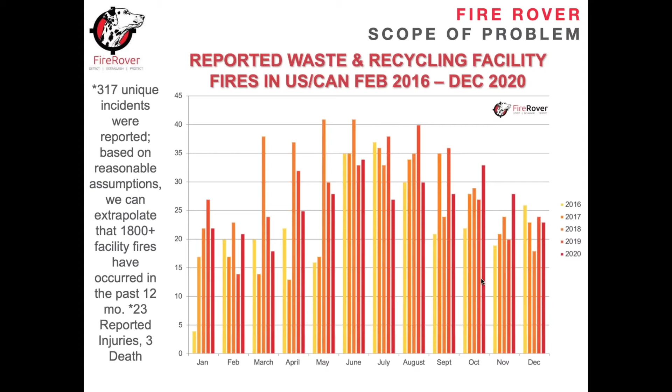So let's talk about the scope of the problem. So basically, if you look at fires, over the past 5 years, I've been reporting fires. This is all the data by month. But really, if you look at an overall basis, in the US and Canada, we've had 317 on average fire incidences that were reported by a media outlet.

And so the reason that I use that as my data was when I first started looking at the industry, there was a lot of, I don't want to call it a cover up, but there was a lot of things that were happening on tip floors and on scrap metal sites where there was inherent risk of fire in the industry and in the business, but it was maintainable. You would have some fires, and about 50% were those traditional hazards. Lithium-ion batteries brought an entirely new hazard to focus.

And again, when you look at lithium-ion batteries, they're a relatively safe type of technology. They're amazing, right? They've made our world amazing. But the problem is that you're not having a ton of issues in the front end of the supply chain, but the back end of the supply chain, where waste and recyclers, if you really truly think about recycling, the goal of recycling is to ensure that you put the least amount of material inside your landfills.

So if you look at waste and recycling, the amount of curbside recycling plus construction and demolition recycling, which is all the buildings, and if you have a hurricane, all that material that gets recycled instead of going to a landfill, and then scrap metal, where they're taking and reusing metals, is an amazing amount of tonnage that doesn't go in. So really, at the end of the day, we have this unbelievable technology whose costs and hazards are being burdened by an industry that I don't want to say needs help, but definitely needed a new approach to look at it.

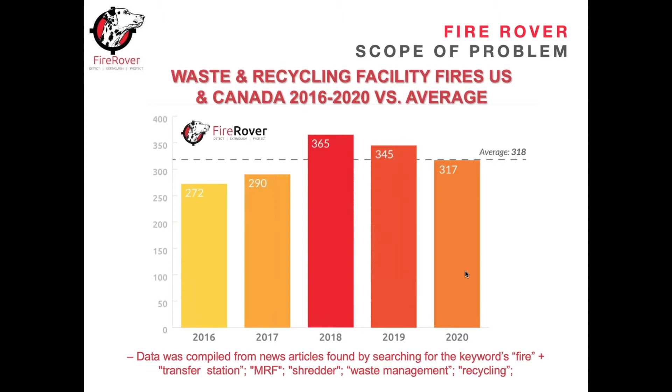But at the same time, it could use some producer responsibility where the manufacturers help solve the problem, as opposed to sitting a little bit earlier in the supply chain, and not necessarily admitting or actually taking responsibility for the problem. The reported fires that I consolidate are all reported from basically Google alerts, right? And in the beginning, there was no data out there. So fire plus transfer station on a Google alert. And if I saw a fire, I would report it at the end of the month. Same with MRF, shredder, waste management, recycling.

So this year was an exciting year. We do have the Fire Rover client saves, and saves are different than an incident, but these are when we've actually put a fire out that was happening, right? So, in 2020, we put out 207. We're in 182 locations. We're in 8 of the top 10 waste and recycling organizations in the US and Canada, so we've been blessed that we've been able to prove that our solution works. But really the goal is to try to take the publicly reported fires and watch them go down.

And what I'm hoping is that in '18, the U.S. and Canada, as well as countries and operators across the globe, had seen the increase in lithium-ion batteries. I mean, basically, they didn't know they were coming. Well, now they know that they're coming and they've prepared, and there's some that have taken technology to another level. There are some that are still a non-believer in what the technology can do.

But really, at the end of the day, the goal is that as we get more client saves, there's going to be less reported fires, and then obviously less known fire incidences, and then reasonable amount of fires. And the reason I use reasonable amount is that I look at a reasonable population assumption of the UK that actually does a great job reporting these fires because they have the environmental agency that requires that these fires are reported.

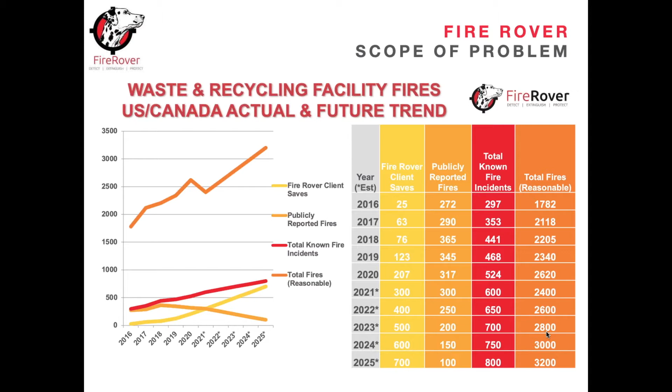So if you look, this is the data from 16, 17, 18, 19, and 20. And again, you can see that waste paper and plastic makes up about 50% of the fires over the last 5 years. The reason I include all those, if you look, the UK will do the same thing where they'll include hazardous, or they'll include household recyclables as well as transfer stations, which is pretty well what this number is. Scrap metal is definitely its own animal.

And again, we had a huge spike in 2018. The numbers went down, and into 20, they have been going up steadily for the past 5 years, at 103 per year. And again, scrap metal, I'll get into specifically, but the industry has focused on traditional tactics they'd used before to try to solve their problem, and they become better operators. But the question becomes, can the things that they've put in actually start to decrease the fires, or are we only seeing what waste and paper and plastic has put in that's going to show the effectiveness?

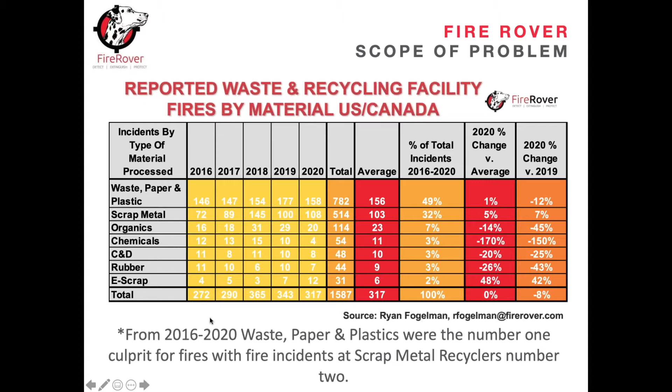We also have C&D, which is construction and demolition. It's probably underreported. Some of that is in waste paper and plastic, just based on misunderstanding of what the reporters report on. The big thing right now is electronic scrap. The idea that a lot of entrepreneurs are trying to pull the rare earth metals and the lithium-ion batteries out of electronics. And again, there are some really good innovators and some great operators out there, but there's also a lot of guys who are just trying to build a business, and they really don't understand the full hazards and risks. So e-scrap, we've seen those numbers grow. I saw 4 in December alone, so it's definitely something that we got to keep an eye on.

EREF, which is the Environmental Research and Education Foundation, has put together a study on the assessment of fires at recycling facilities and scrap metal facilities. What's nice about this is that this is the U.S. and Canada version of the fire survey that we definitely need, and I'll show you some in the EU and the UK that have been done as well, and some of those results. But we just got some preliminary data back. EREF does a great job. They're working to try to get as many waste recycling and scrap metal operators to respond. And I think you see 286 and 281.

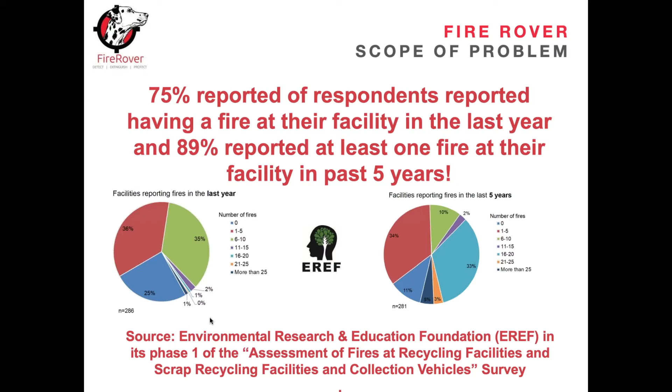But the interesting thing, and it's a high level fact, is that basically over the last year, 75% of respondents reported having a fire. And then in the past 5 years, 90% have reported to have at least one fire. And typically when they're answering a survey, it's going to be big fires. It's the fires they remember, because a lot of these are just going back to recollection.

Eunomia, which is a company in the UK, and the environmental agency had actually put out a ton of data, and they also did a survey. So I'll be talking about that a lot during the scope of the problem. But in England, 49% of their fire incidences came from the transfer stations and recycling, which is pretty equal to what we have. Now, the interesting thing is the scrap metal fires only account in the UK for 18% of fires, whereas in the US, we're seeing that at 32%.

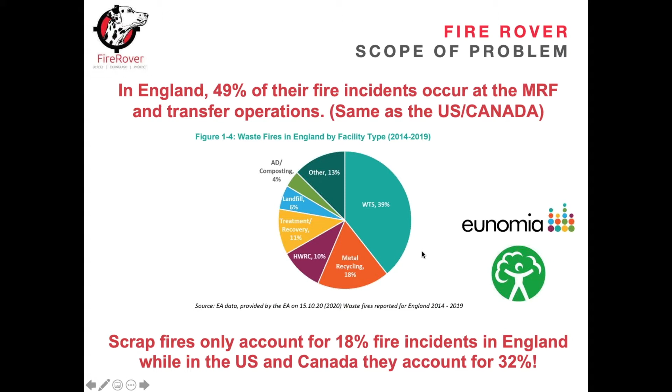And again, the cause of that, we're not 100% sure, but that's really some of the things that we're trying to figure out the solution for. Now, what's causing the fires? Again, traditional hazards. There's always been hazards of pool chemicals and all the different pieces inside, hot ashes, paint. There's always a spike in the summer, and that's from fireworks and hot ashes. And we also believe heat and dry environments, as you look to number three.

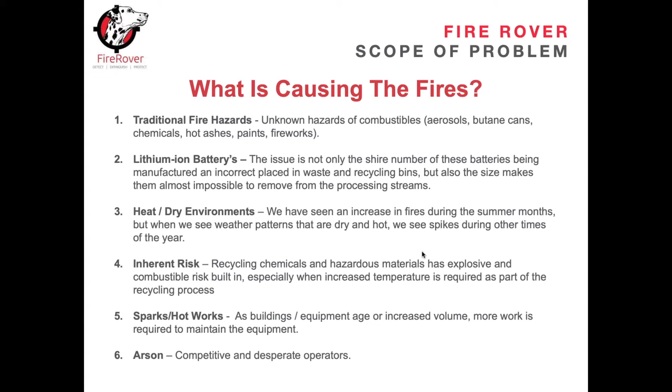Inherent risk. A lot of these waste and recycling, like if you look at the hazardous material or the waste to energy, they're actually burning the material. So that burning can get out of control, specifically in chemicals that need to be heated to be treated. But also lithium-ion batteries. That's the big issue. We also have sparks and hot works, and then arson, which is something that you have to throw in there. But I don't know how prevalent it is, but it definitely does happen to some desperate operators, or potentially from a competitor perspective.

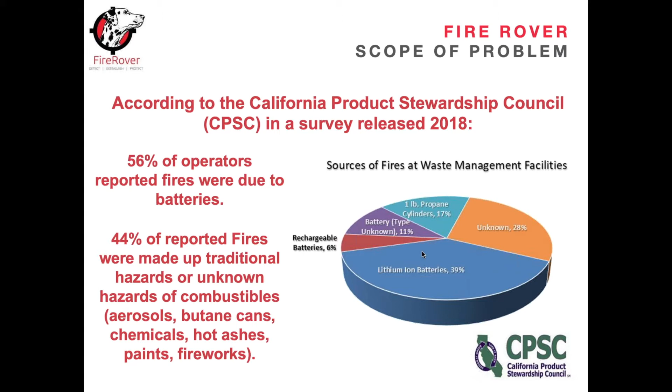According to the California Product Stewardship Council, they did a survey of California waste operators, and 56% reported that the fires were due to batteries, and this was in 2018. So this has really gotten to be a big issue. And then this is where I was saying the environmental agency, they've been reporting fires for 20 years, right? And they're seeing a big number. I think the U.S. and Canadian numbers are about 6 times these numbers. But again, I replaced my reported fires with the data that I've pulled from the reported media.

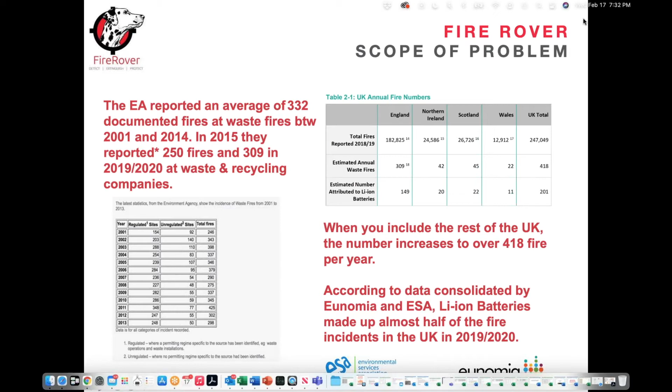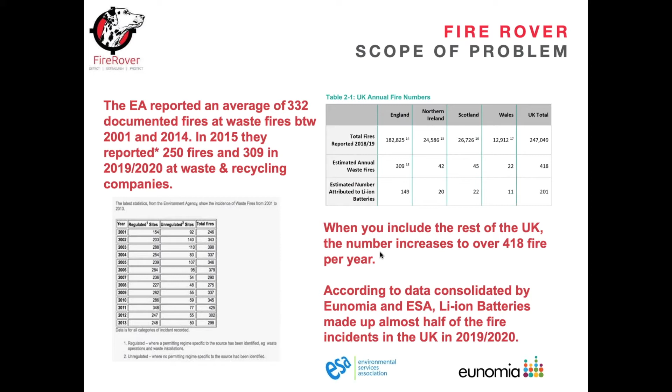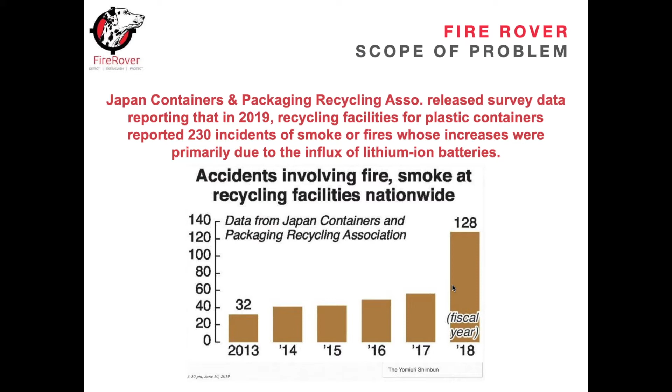But then in 2020, if you look at the UK fire numbers, 201 of the 418 are estimated to be lithium-ion batteries. So it's about 50% of the time. And this is something that they've spent a ton on from a research perspective, the Environmental Services Association, and it was run by Eunomia. They did a great job. So I was saying in 2018, we did see spikes everywhere. In Japan, their Containers and Packaging Recycling Association had an increase of 4 times over that 2018-2019 year. And they say a lot of it was primarily due to the influx of lithium-ion batteries.

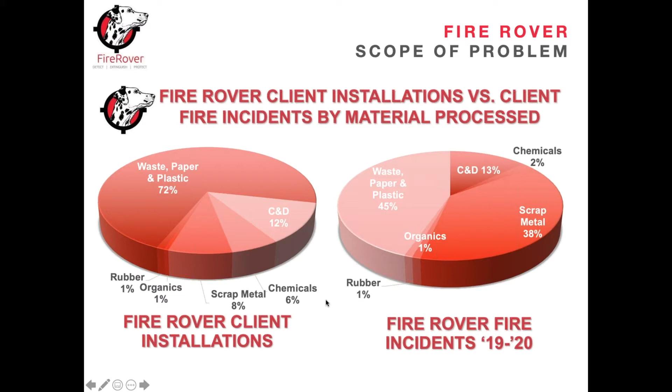I think the big question is scrap metal. Only 8% of our customers are scrap metal facilities, but we're seeing 38% of our fire incidences in those facilities. So they do have different risks from scrap metal, the ASR, the light tin piles, a lot of the shredders, and the mobile shredders that we see sometimes in C&D and sometimes in scrap metal. But there's definitely different hazards to protect.

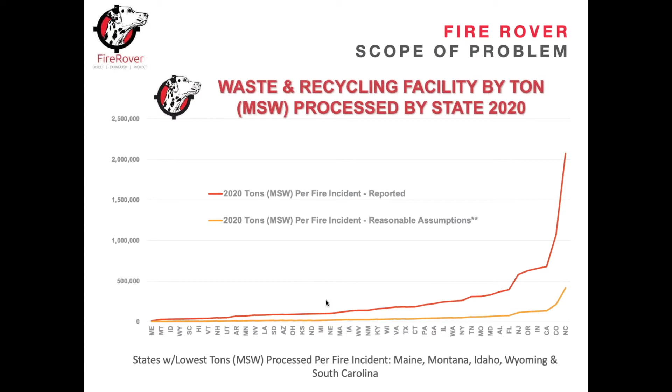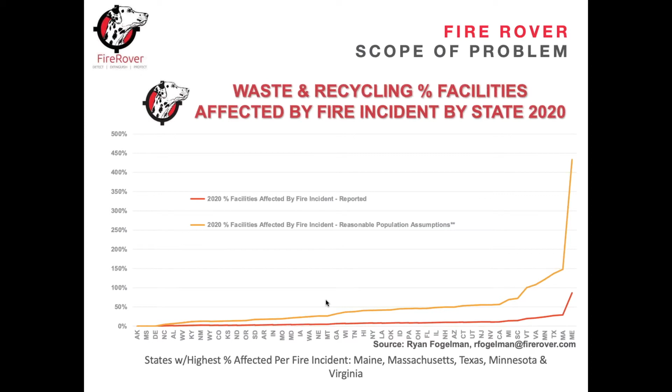The data that I'm going to show you here, you can get it in my annual report. It breaks everything out by state, and it starts to look at how many instances. So how they have been performing over 2020 from a tons perspective, from a facility fire perspective, or how many facilities have been affected.

So when I get into the consequences, we know there's inherent risk of fire. WISH guidelines, which is the Waste Industry Safety and Health Forum in the UK, came out with expert guidance, and they basically said that they aim for a fire to be extinguished within 4 hours. That's considered a successful incident from their perspective. And again, the issue is not the number of fires that you have, but it's always about your severity, because you could have 1 million fires, but if none of them are catastrophic or cause any damage, you're totally fine.

You have one fire that causes a complete burn down, and you're looking at a ton of costs and all the different pieces. So when you look at it, Material Recycling World did a survey in 2018. 75% of the length of disruption was a day or more, which again, that's a long time for a business to be out.

So really, when you look at the severity of fire, this is where Eunomia really did a good job, where they basically broke out the severity into levels of 1, 2, 3, and 4. And so really, your major amount of fires are happening in 3. Your fire severity as a 1 is the worst, right? That would be that you were down for greater than 72, and it's 1% of the incidences.

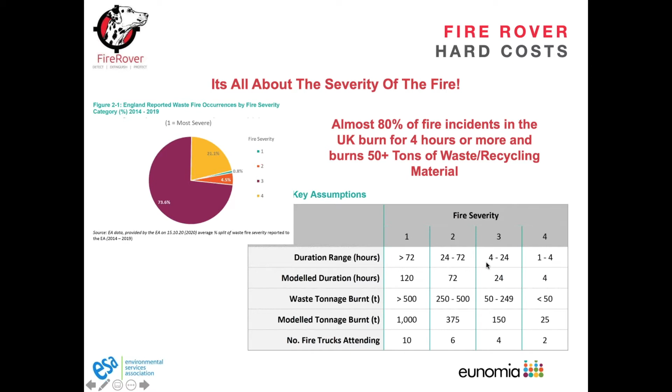I believe that we have about 10 of these a year in the U.S. and Canada, but again, most of the costs are being borne by your three, and then sometimes your four. But if you look at the data, you're 1 to 4 hours. So three, two, or one, which is probably 80%, they're more than 4 hours. So they're basically losing to even the standard definition, which I'll discuss later, why I believe that should actually be cut down to about 15 minutes versus 4 hours.

But if we start to look at the cost, Eunomia really did a good job looking at what the costs were. And basically what they've said is that lithium-ion batteries are causing costs to the waste and recycling operators, the fire and rescue service, and the environment. There's environmental issues, society, so the public at large, and then the environmental agency, which is similar to our EPA. All the costs are being borne by us, in this occupancy and in this industry, and us as the public, and not the manufacturers who are making all this money.

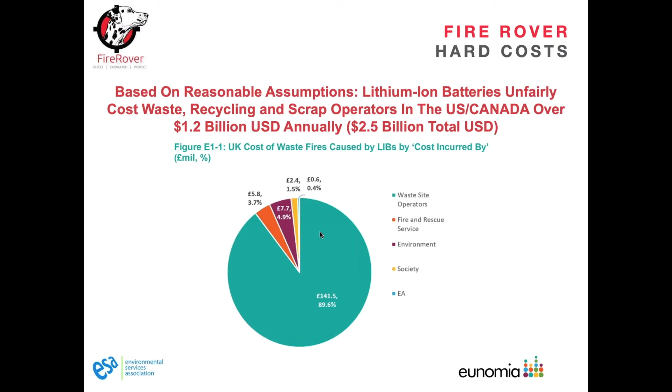And again, I'm a pure capitalist, so I believe that they should be able to manufacture, but I do believe that they should be held responsible for helping solve the problem. So again, we're looking at the equivalent from pounds in the U.S. to $1.2 billion a year in lithium-ion battery issues, and then 2.5 billion in total fire issues.

So if you're looking at the severity of the fire, the ones were about 5 million U.S. or 3.8 million pounds, but you're still looking at significant damage, right? You're looking at 2.5 million in category 2. You're looking at about 1.3 million in category 3. And again, your 120 grand is not a small amount. I mean, we sell a FireRover for 110, 111 grand, fully in with installation. So again, these costs are something that can be avoided.

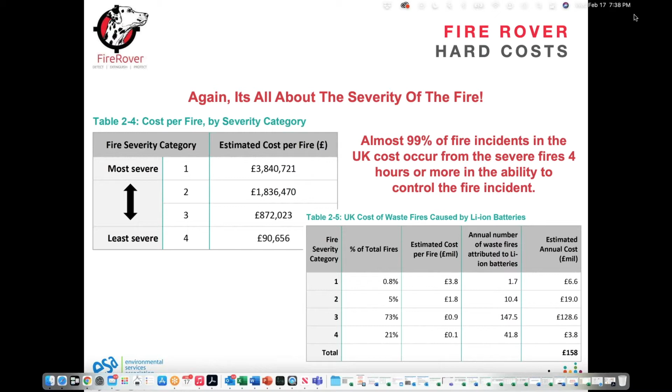Now, if we look at the estimated number of waste fires attributed to lithium-ion batteries, again, you're seeing the same breakout, and almost 99% of the incidences were 4 hours or more in the inability to control the incident. So we really got to look at this. Another issue is injuries and deaths. And again, we're lucky in waste and recycling. It was the 5th most dangerous. It actually just moved down the list to the 6th most dangerous occupation in the U.S.

And so a lot of focus is put on slow down and go around, and campaigns by some of the associations like SWANA and NWRA. They're really good associations in the industry. But really, when you look at it, most of the deaths are accidental, and it's typically not an employee, even though some employees have been harmed from explosions in the past 3-4 years.

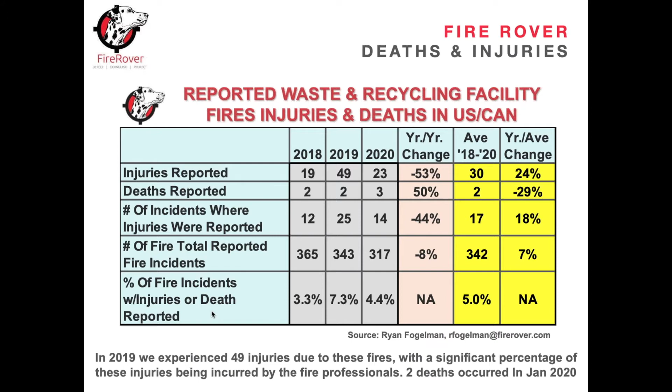But really, a lot of the injuries occur to the fire department, to the fire professionals that are fighting the fires. So on one hand, it's a great thing. You're not having employee injuries, but at the same time, any injury that's unnecessary, if you get rid of the fire, those definitely can be avoided.

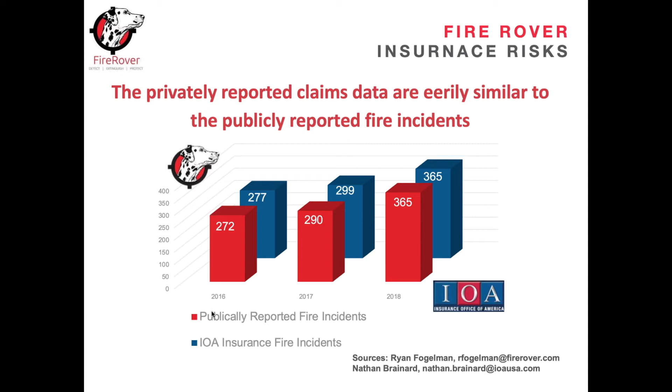Now, when I start to look at insurance, because insurance is a big part of waste and recycling, this is the claims data from the top 5 insurers in 2018 that actually left the industry. They started running for the hills, and Nathan Brainard has given me a ton of this data. In '16, '17, and '18, carriers were leaving at a crazy pace. And at that time, a lot of people were saying, Ryan, stop talking, because you're sharing an issue that we have. This is our baggage with the insurance company.

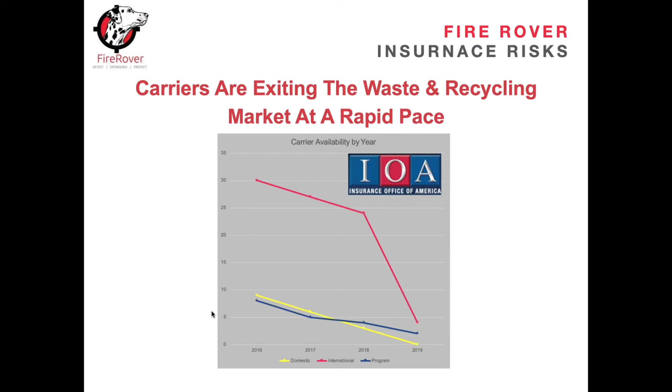And what was interesting is that the insurance companies don't care what I have to say, right? What they care about is claims data, and whether it's an investment. It's purely an investment, right? Their actuaries are looking at it saying, what's my risk mitigation, or what's my risk? So shredders were huge as an increase.

And again, we see those in scrap metal, where you would have a lot of lithium ion batteries that were getting into all parts of the operation versus the old hazards that were happening on the front end, where you could pre-sort them out. Lithium ion battery specific fires, these are claims. Hotspots, equipment. So a lot of these are due to lithium ion batteries, or the growth could be due to more lithium ion batteries.

So again, the issues, and this is what Nathan had basically said, that you might be uninsurable if you have issues. If you have no losses, you're still getting an increase in your insurance coverage. So really, for us, it's been how do we bring the insurers back in the industry when there's an inherent fire risk? And there are tons of occupancies out there, as you guys know, wood processing and refining and a ton of others from a manufacturing perspective where there is a risk of fires inherent in the operation.

So as an industry, we need to find solutions where the insurance companies can mitigate the risk as an overall portfolio. Of course, as an operator, you have to look at it at a site level and try to find those solutions. So really, when you look at solutions, I believe that we have a patented solution that has worked and is still working and will continue to work in the future. So I'm extremely partial to it for more than just the fact that it's really based on results.

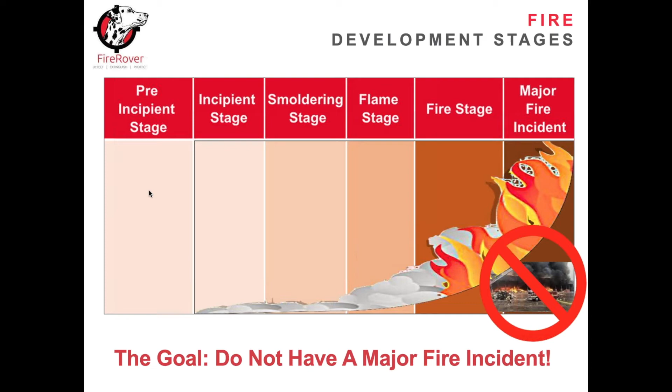So again, we're trying to catch an incipient stage. We do have a pre-incipient stage, so I can set the tripwire as early in the process as possible for some instances and some types of specific operations like ASR. We can see a ton of heat abnormalities in ASR. We spray them with environmentally cooling agent, and you never see a flame, and everything works out great.

So again, what we use is early detection. We have human beings that are in UL certified facilities, highly trained agents. They're not only looking at the detection, but they're verifying if there's a fire. These are very active locations. So you have to set your tripwire early, right? You have to set it low enough that forklifts and equipment still cause alerts. So you get a ton of false positives.

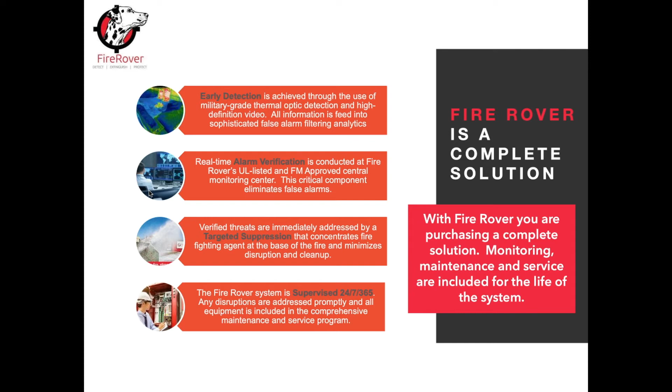We have a human being that looks at it and verifies it, and then that human being can, number one, call the fire department and call on-site help or a fire brigade, and number two, they can respond to the fire remotely 24/7, 365.

So really, this is the Fire Rover unit. It's a 20 by 8 by 8 container. It's got a 22-foot mast on an outdoor unit. Indoors you're going to see that it's custom piped in, and you're going to have 2 cameras and a nozzle. Inside the box, it's heated, it's cooled. We have some as far as Calgary, and some as low as Miami and Texas and Nevada in the desert. It's heated, it's cooled, it's nitrogen powered, and we have a 1,000-gallon tank.

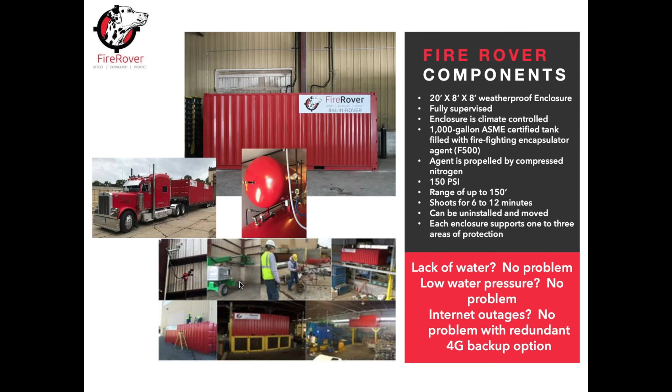So I'll get into a lot of this. We really have 4 solutions, right? One is the thermal only. So we do thermal detection, and we call the fire department, or we call on site, fire brigade on-site response. Two, the Fire Rover solution. That's our standard box solution. It just needs internet, electricity, and a pad.

It'll shoot for 6 to 10 minutes, 12 minutes if we're using less pressure. But most of the time, we're putting out 20-second fires. We shoot it, we put it out, we have fire brigade, it goes back. We'll use 2% of our tank.

We've developed the Fire Rover sprinkler replacement. There are over 90 facilities that we have currently where the Fire Rover is the only type of fire suppression. But we also have facilities where they've been formally approved, from a variance or an approval from the jurisdiction, in lithium-ion battery specific operations, to use our Fire Rover system as a sprinkler replacement. And then we also have variances, Fire Rover in lieu of a sprinkler system.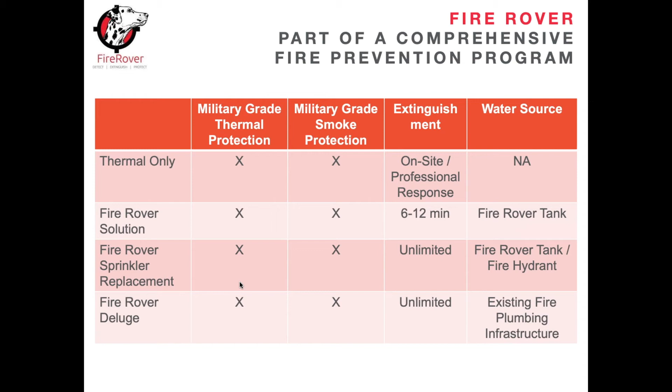And with that, we actually have a Fire Rover quick connect nozzle. And then we also do a 4G backup. And there's a few things that we need to do to ensure that we can keep the water going for over 40 minutes. And then we also have the Fire Rover deluge system, which is a boxless solution where we basically use the existing fire pressure, and we turn it into large cameras and nozzles all over. And I'll show you an example of those.

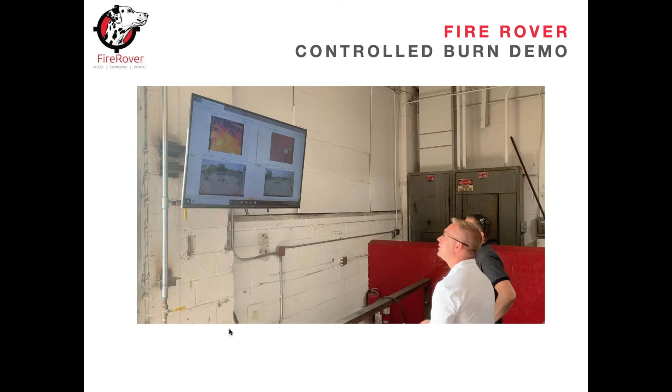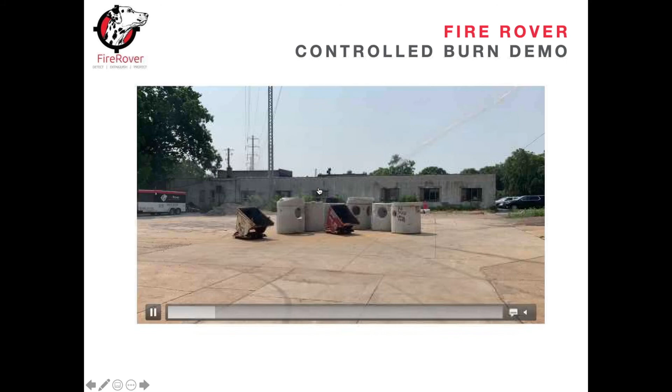So really, this is a controlled burn, and I'm going to show you how it works. This is in Detroit, one of our facilities. You're going to see on a screen the thermal cameras, and I'm going to go back. This is the beauty. I'm going live, so I hope you guys are having fun with this. But really, there's 4 different cameras. When I tell people that we're selling them a camera, it's more than that. It's the thermal camera, and then it's HD cameras, and all the different pieces that go with it.

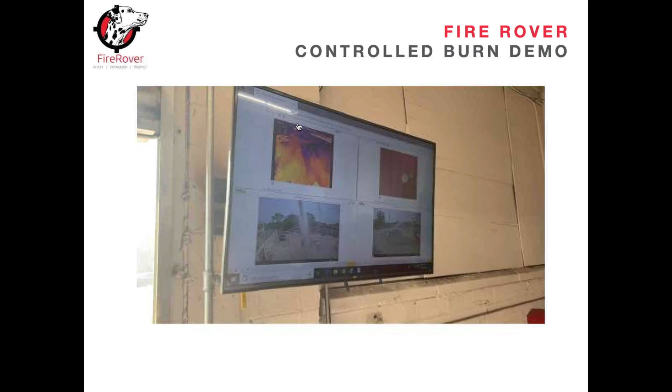But really, this is the Fire Rover shooting. It's going a little slow right now. It just had to catch up from a buffering perspective. But this thing will shoot about 150 feet. There's a joystick on the desk from our agent perspective. And again, we can shoot through darkness, we can shoot through smoke and heat, and we can get a pretty good range. So this is an example of a tip floor.

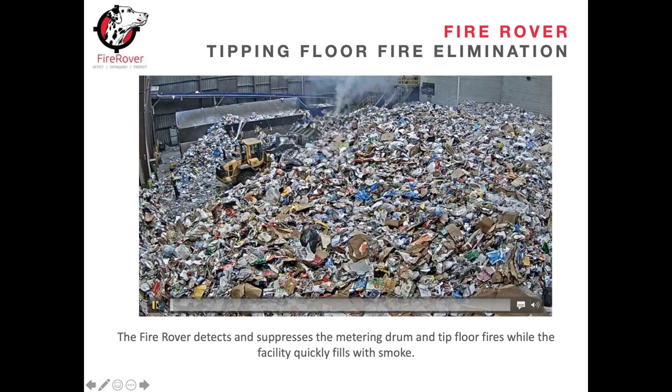Inside here, one of the things that amazed me, as we are on the front row of a lot of our customers, is that we can see a lot of these incidents develop. And again, you're more than welcome to visit.

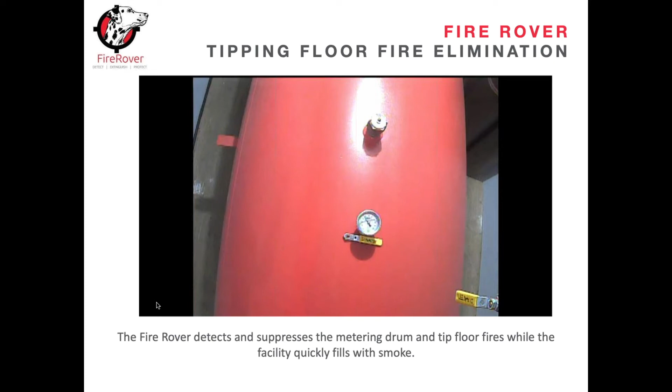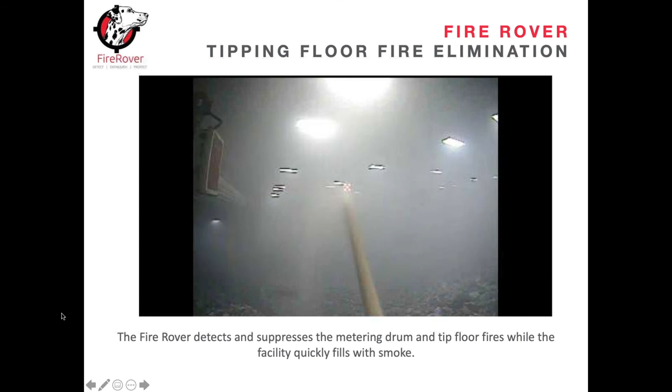But what we're going to see again is that there was a fire. This is our agent looking there. You saw one of the employees evacuate, and the building fills with smoke relatively quickly. I mean, this was real time. It was literally within minutes. I think it was less than a minute.

But again, we're going to spray this. We have smoke, but we're using our other cameras. We're going to shoot. There was a little fire on the tip floor, and then there's also one in the infeed line. And again, we're going to have it out, and we still have 80%, 90% left of our tank. This is an environmentally friendly cooling agent. There is no cleanup. It evaporates, and these guys go back to work. So again, no hard costs, no issues that will have you shut down for 4 hours.

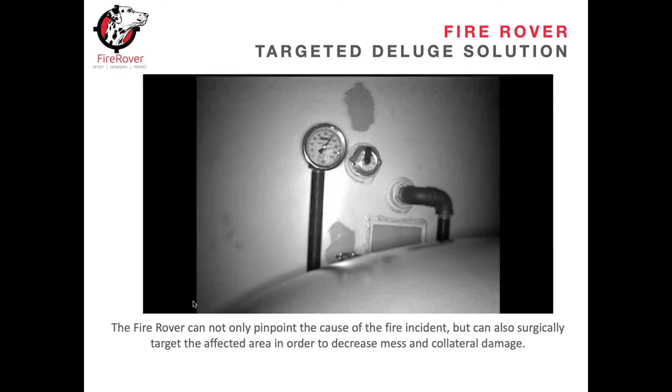So if you look at it, this is an example of a hazardous material facility. We do a ton of hazardous materials. Basically they're taking chemicals and recycling them. This is the 5th pallet in with a chemical that's been reacting, which is not a good thing, right? In the old days, a human being would have to take that out with a forklift, or it would start a domino effect and everything goes up.

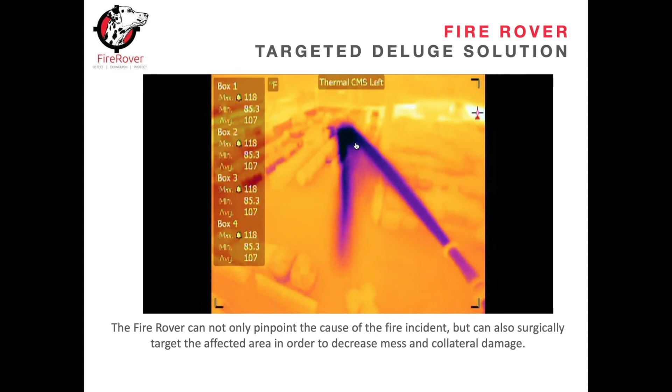So here we saw it, we're looking at it. We basically let them know on site. You'll see one of the employees comes out in a bunny suit, and he's waiting for our go ahead. Now it looks like we're just spraying, but if you look at the nozzle, we are literally hitting the fifth pallet. We know when the danger is not there, and when there's not a heat abnormality. Now that they've done this, they can remove the other pallets.

And again, the product evaporates. So we were there for 20 seconds. They move them, and if this started to heat again, we'd start to shoot it again. So we are there. We don't just disappear. We're there 24/7, and the key is that we don't just release. We do more than release, right? We release, we watch, and then we're ready to release again if we need to.

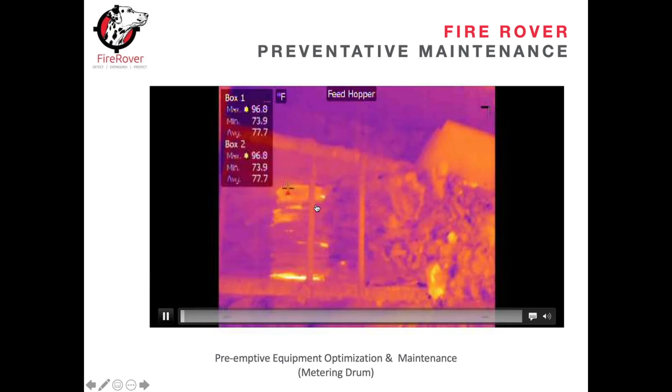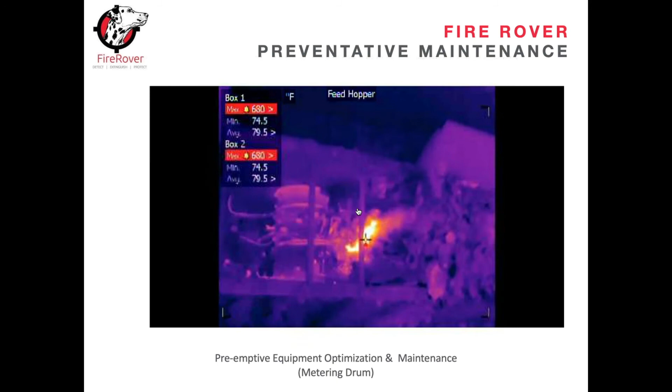Let's get in a couple more incidents. We do a ton of preemptive maintenance. So this is a metering drum. When some sort of obstacle gets into the drum, it starts to overheat. When we see that heat, we'll actually shut down the system, and then we'll spray it. Here's a camera. We see a fire, it literally shuts down all the conveyors. And then we're going to discharge it. And actually, that's a fire extinguisher.

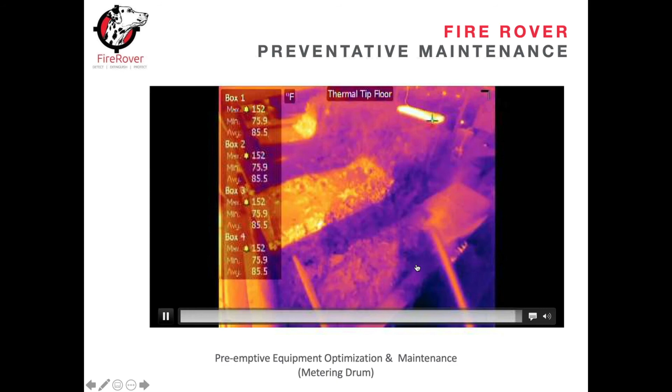This is us, a minute 40, right? We're putting this fire out, and you'll see we make pretty quick work of it. But really, the big thing is that we can look from a preemptive maintenance perspective, and if a lithium-ion battery gets caught in there or something else, we're there to handle it.

And it's funny because a lot of times we put out, like, one lithium-ion battery in a tip floor. People want to see, hey, can you put out a real fire? Well, there's a ton of real fires. We put out a rubber feedstock fire in less than 4.5 minutes before the fire department arrived. You can definitely see that at the Fire Rover YouTube page.

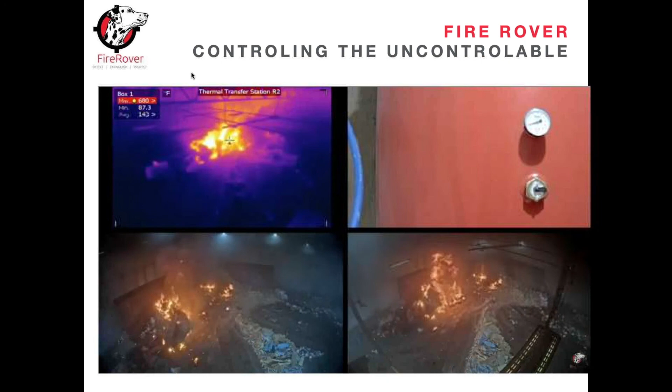But loader operators put out a lot of fires, right? They're on the front lines, grabbing a lithium-ion battery, throwing it outside, hitting it a couple times or spraying it with water, and everything's good. When you're dealing with a deep-seated fire, you're supposed to pre-wet, then pull away a layer, pre-wet, a layer, pre-wet. When you introduce it to oxygen, you see what's happening.

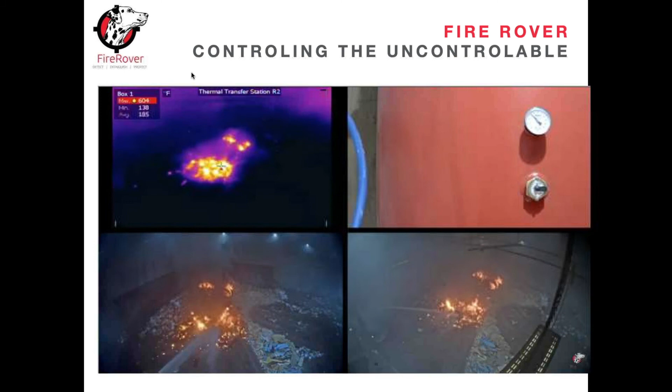And this is one of our C&D operators. Unfortunately, it's a wood product, and they had an accelerant in there, they don't know what the accelerant was, and this thing looks messy.

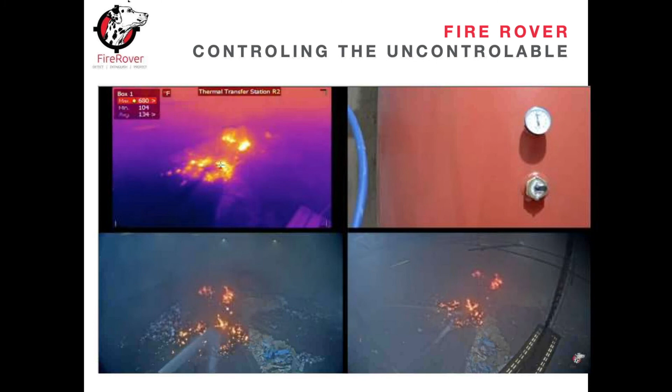And we're going to shoot, it's at 4 minutes, but this is a 9-minute video. But what you're going to see is, once we start making progress, we move around. We're always shooting at the hottest spot. We start making progress. There's no spot in there that's hotter than 680 degrees. So, we know that's happening.

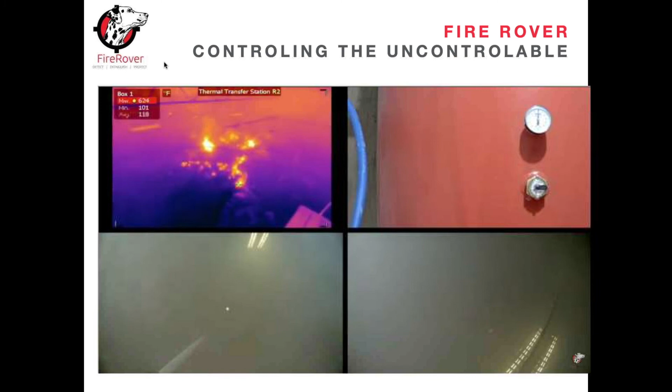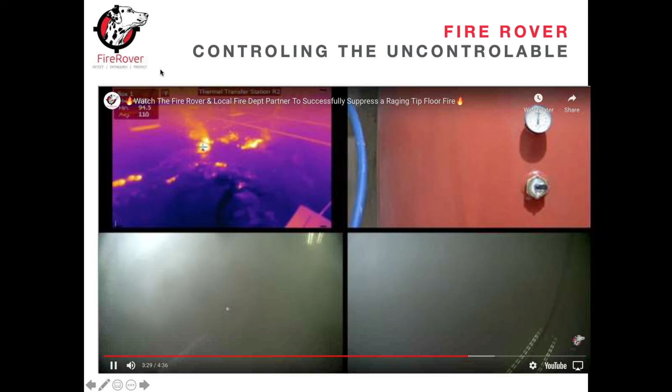And again, we call the fire department. They're going to arrive on scene. So, once the fire department gets here, could you imagine if we weren't spraying for the 8 minutes that we were spraying? You're still seeing we're going after it, it's being moved by our operator. And we are making progress. And then here comes the fire department at the end, to really finish it and do final extinguishment.

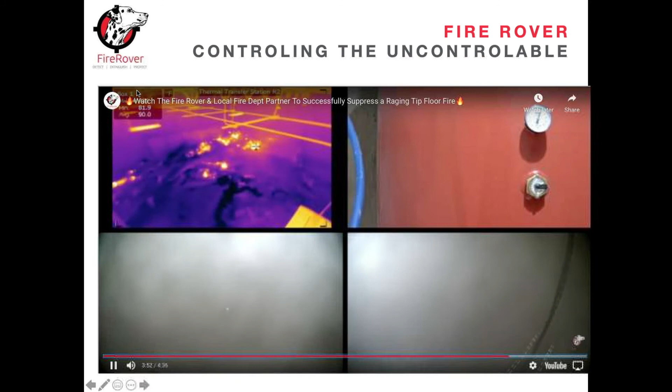But this fire, there was no damage. There was definitely cleanup, but there was no damage to the building. And most importantly, there wasn't an insurance claim, which is the last thing that you want to have these days, is that insurance claim. So, okay, sorry about that.

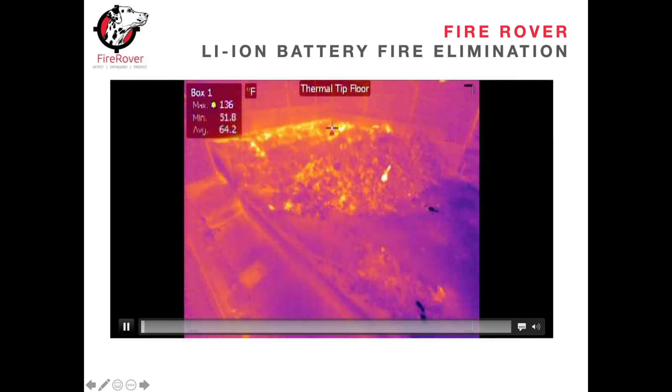Okay. All right. So this is a lithium-ion battery fire. And again, this is what most of the fires look like. It's the middle of the night, you got a tip floor, battery goes off. You're going to see it again from a different angle. It goes off, it explodes. It's sitting there, it's heating. Before it gets to thermal runaway, one of my operators is spraying it. We put it out, and there's a video sent in the morning, and nobody knows the wiser.

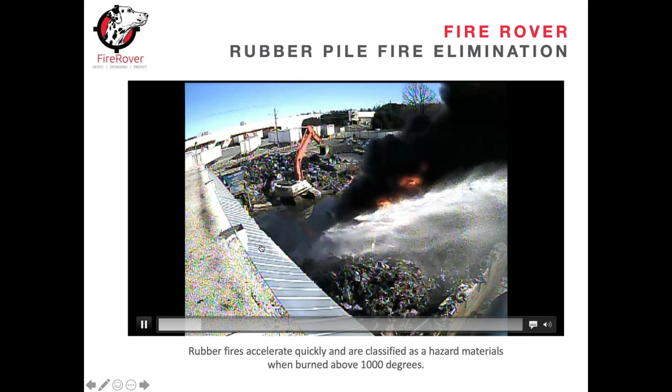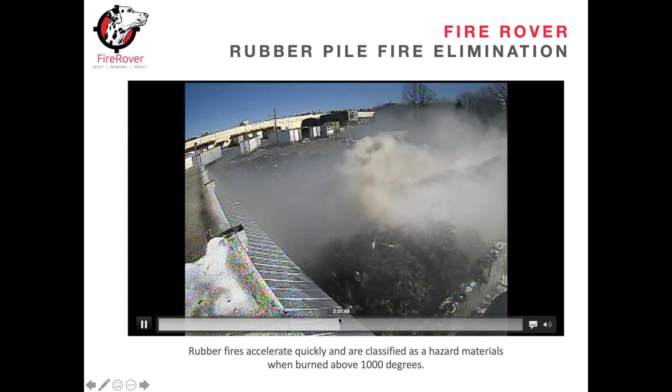Our operator is trained to know to spray the collateral assets so that if any embers go over, they don't start burning the building. And again, you'll just see us work through this in real time, a minute 40. We called the fire department to arrive on scene, and we're doing everything we can. And you'll see around 4 minutes, we'll have the fire out, and we'll have built-in fire watch, and we still have 40% left of our tank.

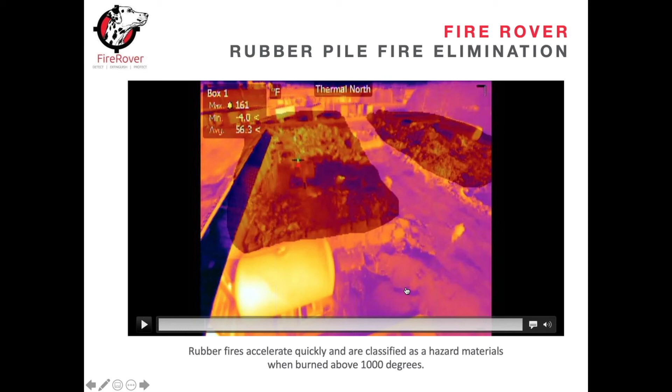So right there, you're going to see. And again, if something else happens and we know it, we're going to go at it. But we've gotten to a point now where it's controllable. And again, in this case, the fire department came about 5 minutes after this event completed.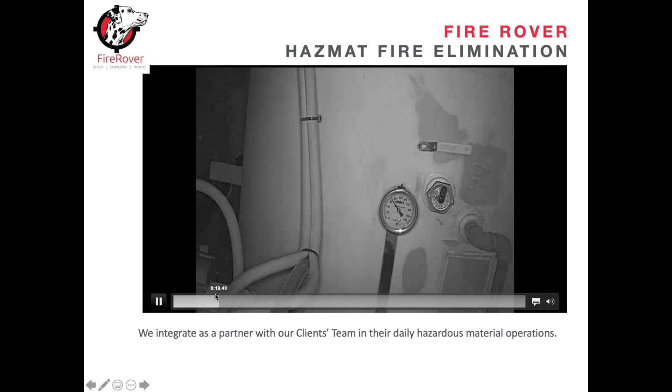And here's the last one that I'll show. This is one of our hazardous material facilities, and people always ask, hey, we have a rough environment. This is for rough environments. Any sort of operation where you have an industrial line of sight, our solution works. This is filled with dust. This is combustible dust, right? Not only are we putting out this fire, but we're also dealing with it in this type of dust, in this type of environment.

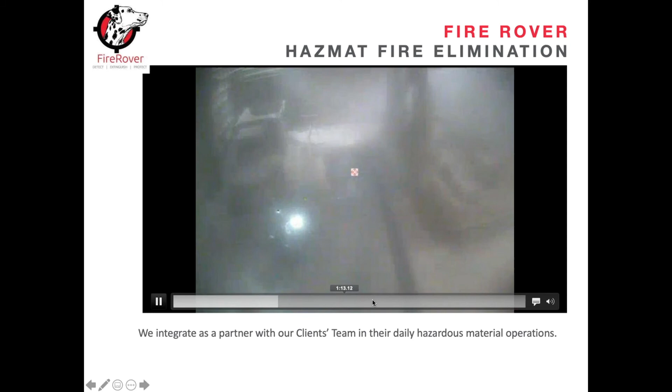We're in the middle of the desert. And we guarantee that our operation will work. And that's part of the package that we put together for our clients. So again, we're going to shoot this bad boy, and we're going to have the fire out. But most importantly, we can still see, right? And we use the combination of our thermal and our HD cameras to do so.

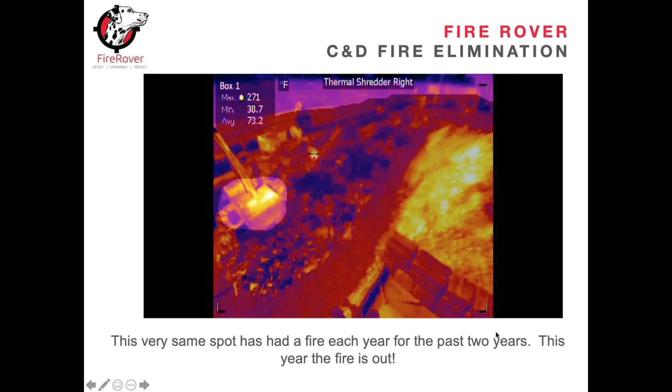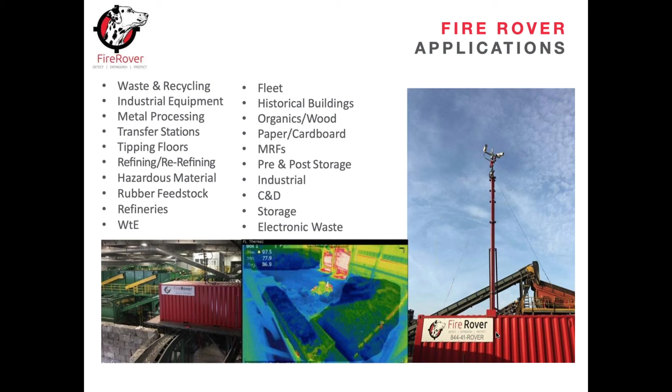At this point, we have a ton of different types of applications, but really the idea is, if you need a sprinkler system for indoor or outdoor, and you have a facility that has a 40-foot roof. Sprinkler systems are amazing. They were created for high-rise buildings and for homes, right? They're great. But our type of solution is, in my mind, the way of the future. And again, we're fortunate to have the patent on it.

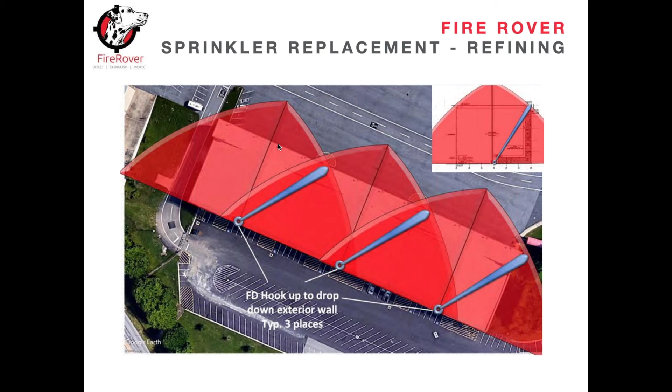So the idea is we can spray on as quickly as possible, but we have a human being that knows where to aim it, as opposed to the complete deluge and the amount of water that gets wasted and causes damage. This is an example of one of our variances for sprinkler systems.

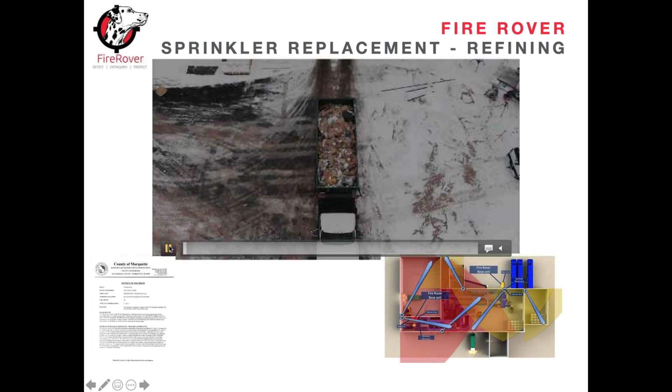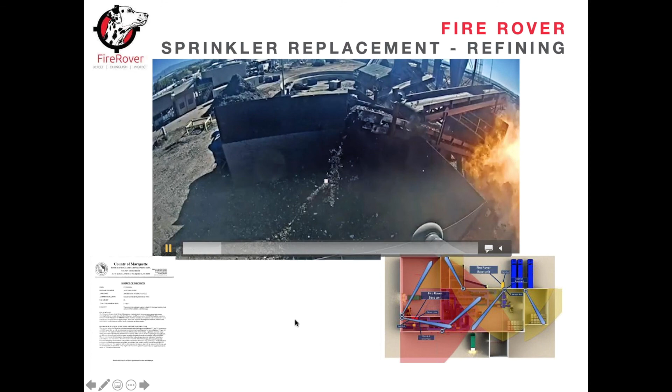And again, they required a number of different things, and this is where I'll show you. They required for us to get the variance that we could meet the 40-minute amount of time from a water perspective. So that's where we have the quick connects that have basically been designed for the fire department to get there and fight these fires.

And what's been nice is that we have a solution where this is a lithium-ion battery operation, and we did the same thing there. So if you've heard about the fire professionals who got basically, I don't want to say they got hurt, from a lithium-ion battery operation in Arizona.

Well, most fire departments are now taking a defensive approach when they get to any facility that has lithium-ion batteries. Now, again, waste and recycling is a little bit different because we don't have the amount of lithium-ion batteries in an area that they would be if they were powering a bank of computers or others. So there's a ton of different hazards that are out there. But when you're dealing with a decent amount, the hazard is real, and you definitely don't want people fighting the fire.

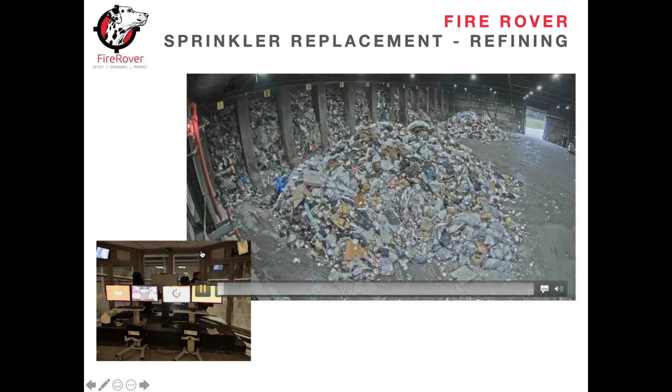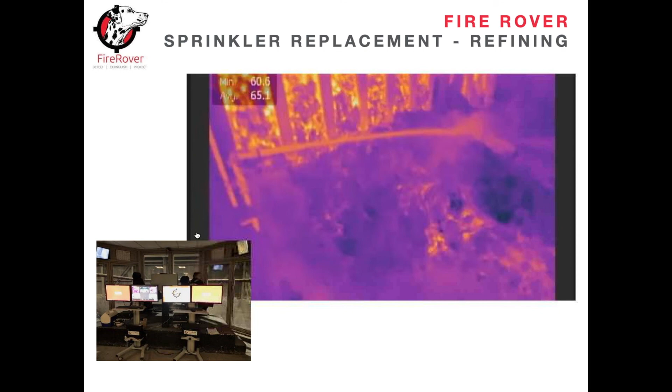This is an example of our Fire Rover boxless solution. So this is where we literally build our system onto an existing infrastructure. And again, we can shoot over 200 feet in these. This specifically is a waste to energy facility. It's basically a big power plant. And we're able to shoot about 70 feet. You'll see, we actually have 2 on the tip floor, and then we have 3 nozzles on deck.

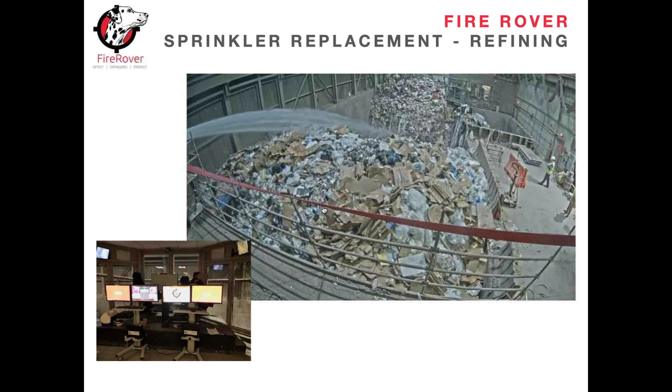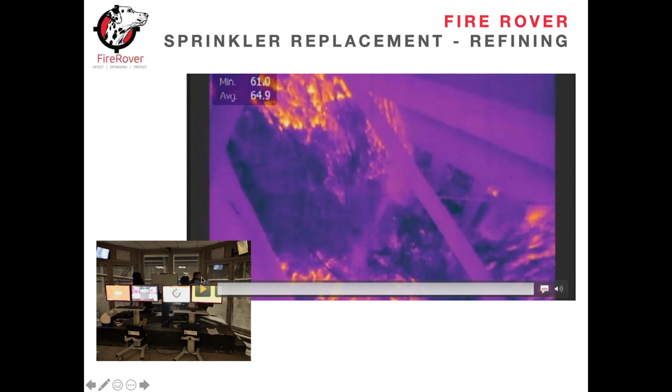And again, we do have portable suppression units and CAF systems that we use. These are in combination with the thermal, and you're able to shoot the same type of distance. And these are great for fire departments when they get on scene. While they're setting up, and it takes them 10 minutes to set up and decide whether they're going to fight your fire, you have one of these for them to really get in and start to fight. And again, you're using your environmentally friendly cooling agent on these.

So, we've been fortunate to be awarded, and again, we have 8 of the top 10 waste and recycling companies in the U.S. and Canada. But really, when you look at this industry, there's a lot of cost and a lot of pressure that's being put on the waste and recyclers to solve the problem, and all of this is being borne unfairly. It's being borne by the operators and the public.

So, it's really important that we get the producers to not only spend money trying to educate the public on not putting batteries into curbside recycling and teaching them how to recycle properly. But the issue is for every person that you teach that to, there's 10 more batteries that are coming. And the global use of batteries, if you look at any of the numbers, we're talking 10 times what we use today in the next 10 years. So it's definitely something that we need to keep an eye on, and we need to develop solutions for.